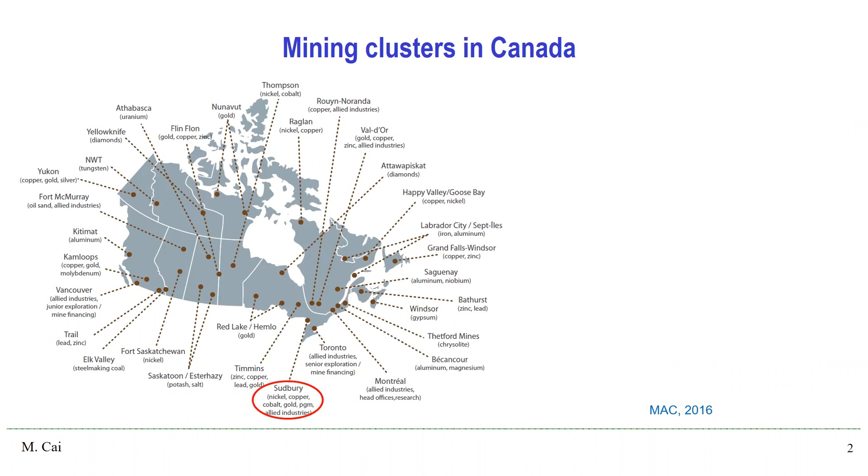Canada is one of the world's leading mining countries, mining and selling a diversified array of minerals such as aluminum, copper, gold, etc. Potash production is ranked #1 in the world. Uranium and nickel rank second. There are more than 1,000 mines in Canada. Quebec, Ontario, and BC have the most metal mines.

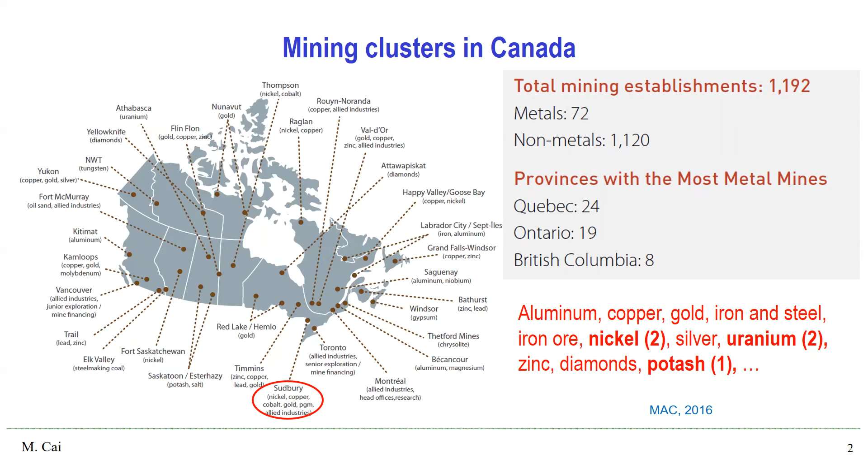Canada has many deep mines. LaRonde, Kidd Creek, and Creighton mines are in the list of the top 10 deepest mines in the world.

For those who have been in Toronto, you will see the CN Tower, which is 553 meters high. You will see it from any corner in the city. However, we need 4.5 CN towers stacked together to reach the bottom of Creighton mine. We need 5 CN towers stacked together to reach the bottom of LaRonde and Kidd Creek mine.

Many mines are in the Canadian Shield, which contains some of the oldest rocks on Earth. The Canadian Shield makes up roughly 50% of Canada's land mass.

In the Canadian Shield, the horizontal stress is about 1.5 to 2 times higher than the vertical stress. At a depth of 2,000 meters, the maximum principal field stress is about 60 to 80 MPa. When an excavation is created, the maximum tangential stress around the excavation can be as high as 150 to 200 MPa, which can fracture the rock easily.

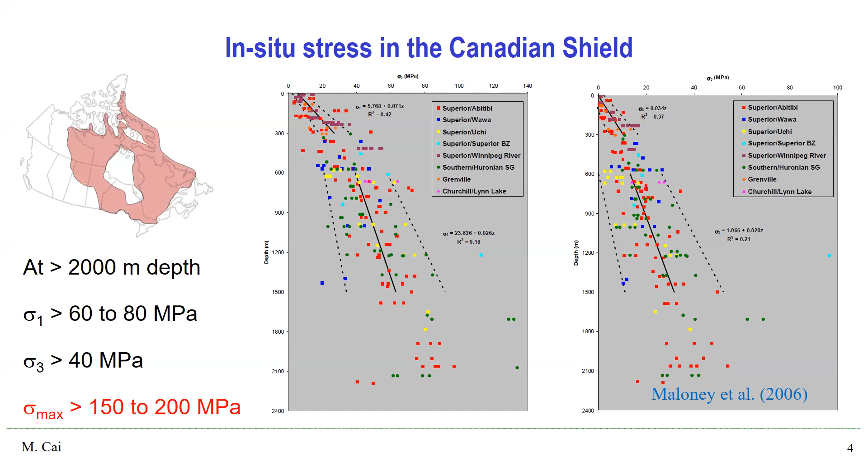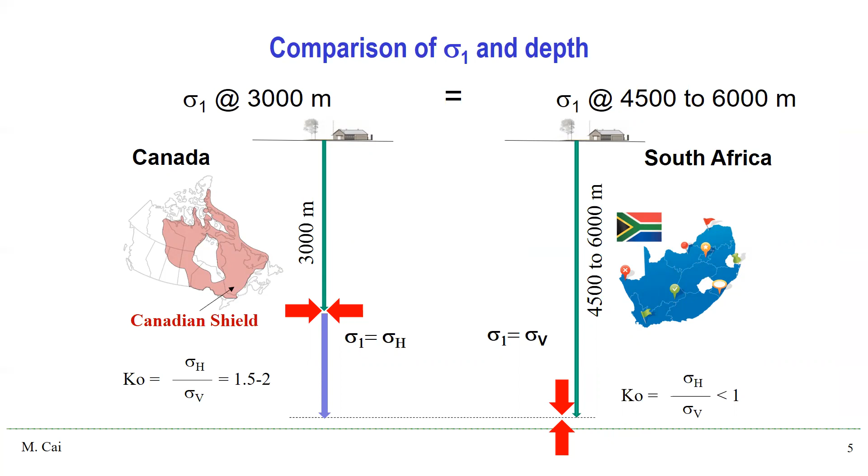Due to the high horizontal stress in the Canadian Shield, mining at 3,000 meter depths in Canadian mines is equivalent to mining at 4,500 to 6,000 meter depths in South African mines from the in-situ stress perspective. In other words, our shallow mines have more challenging stress problems than many other mines in other countries.

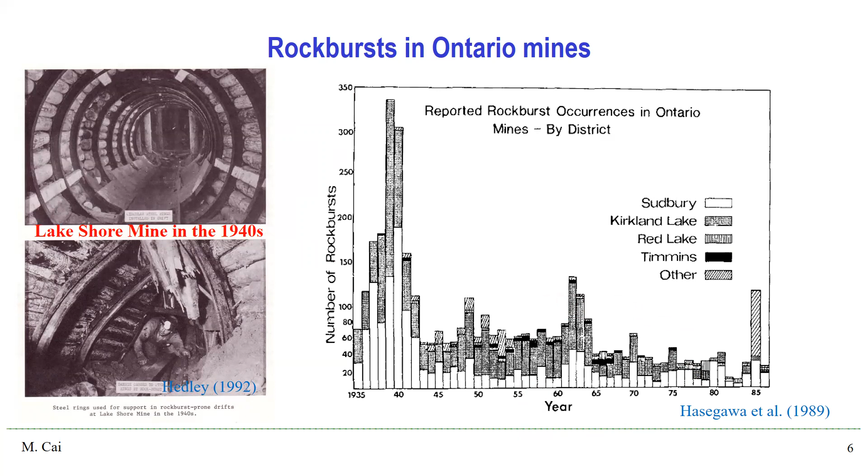In the 1930s and 40s, mines in Ontario had been dealing with rockburst problems in their operations. This figure shows the number of rockbursts in Ontario mines from 1935 to 1986. A decreasing trend can be seen, which was due to improved mining methods and technology.

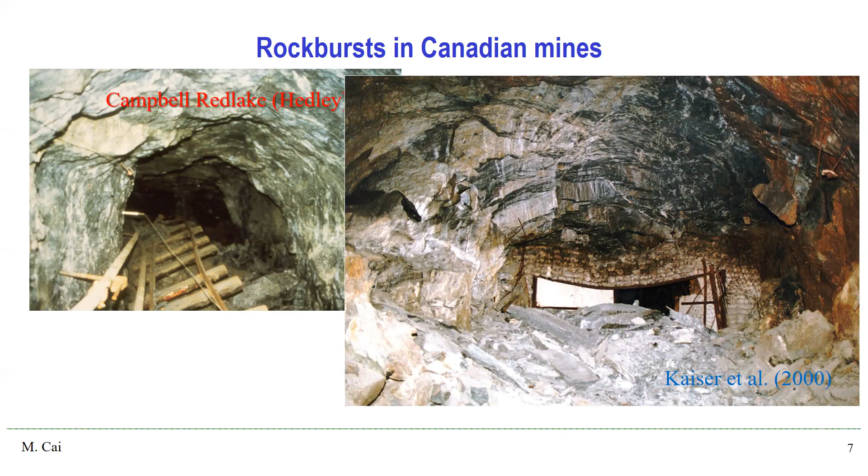Here are a few examples of rockburst damage. Rockburst in Campbell Red Lake mine caused floor heave. A rockburst caused large rock mass bulking and fall of ground at New Brunswick mine. A 3.9 event caused extensive damage to 4 levels in Kidd Creek mine.

On June 20, 1984, a 3.4 event occurred at the Falconbridge mine in Sudbury, killing 4 miners. This accident caused great concern in the Ontario mining industry. A provincial inquiry was conducted and a report produced, and this is the famous Stevenson report.

One recommendation from this report was that we need to conduct further research to understand the mechanism of rockburst. As a result, 3 research chairs were established in 3 Canadian universities.

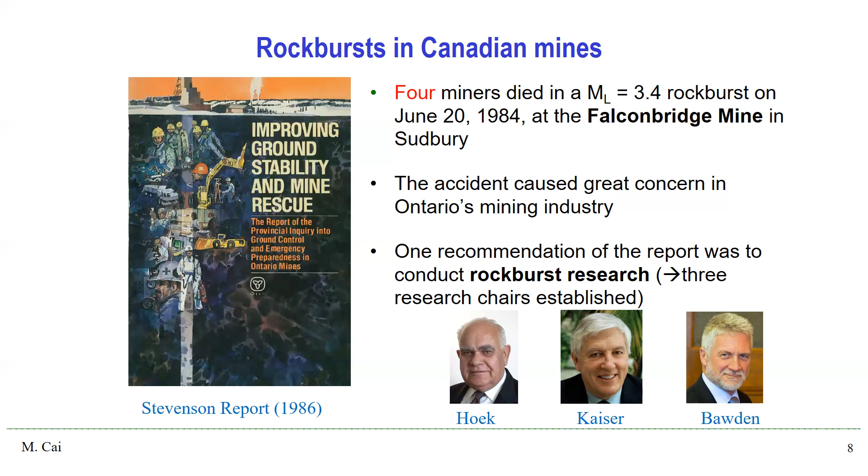Recognizing the problem of rockburst, some research projects had been conducted in Canada to address the problem. One major project was started in 1985. Through this project, all Ontario metal mines started to use microseismic monitoring systems in their operation. In the end, the Rockburst Handbook for Ontario Hard Rock Mines was published in 1992.

Another major research project was the 5-year Canadian Rockburst Research Program, supported by 12 mining companies and the Ontario government. A major focus of this project was to add knowledge in rock mechanics and ground control. One major outcome of this project is the Canadian Rockburst Support Handbook, published in 1996. This is a landmark work that laid the foundation for rock support design in burst-prone ground.

After many years of research by scholars around the world, we now have a better understanding of the conditions for a rockburst to occur. I summarize them into 4 conditions. First, mining-induced stress needs to be high to trigger rock failure. No failure, no rockburst. It's that simple.

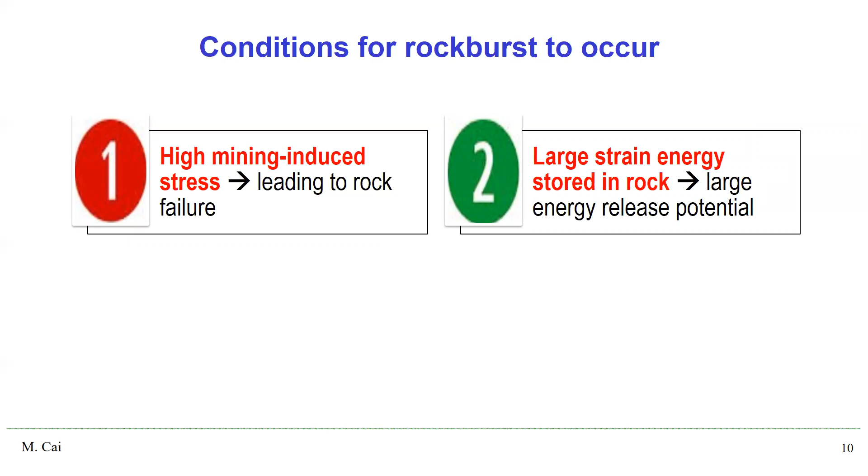Second, the rock must have the ability to store a large amount of strain energy before failure. This is why rockbursts occur in competent rocks. Third, the rock has to be brittle. Brittle rocks tend to fail violently when the confinement is low or rock support is insufficient. Finally, the mine loading system stiffness has to be low. In this case, rock failure is unstable or violent.

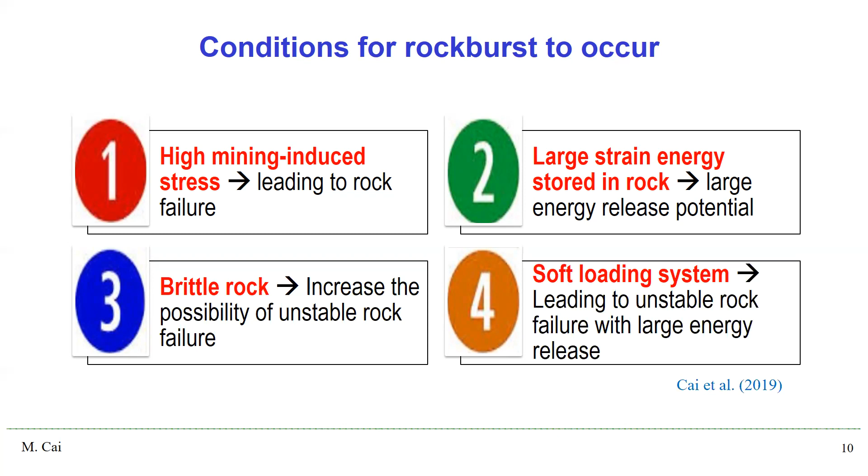Rockburst damage can be in various forms. Typical rockburst damage to underground excavations include seismically induced fall of ground, which is characterized by large blocks in piles on the floor, rock ejection, which is very common in strain burst, and excessive rock mass bulking.

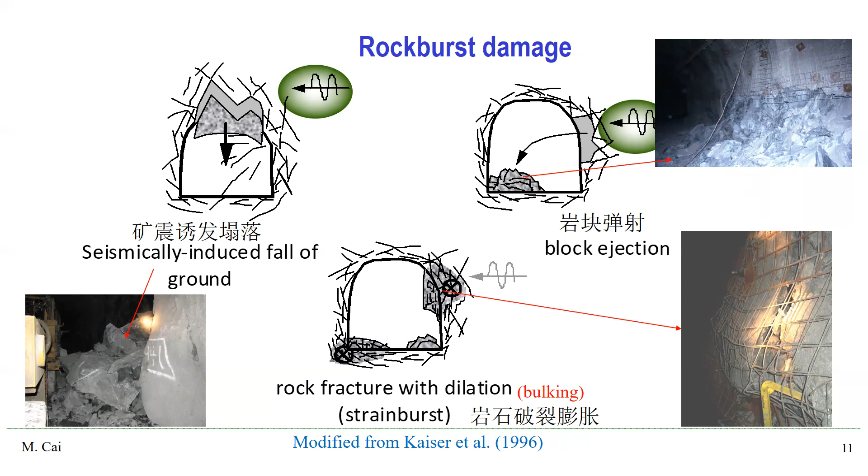There are so many factors that influence rockburst damage. The severity of damage can vary greatly over a small distance in a mine because of the variability of many factors that influence rockburst damage.

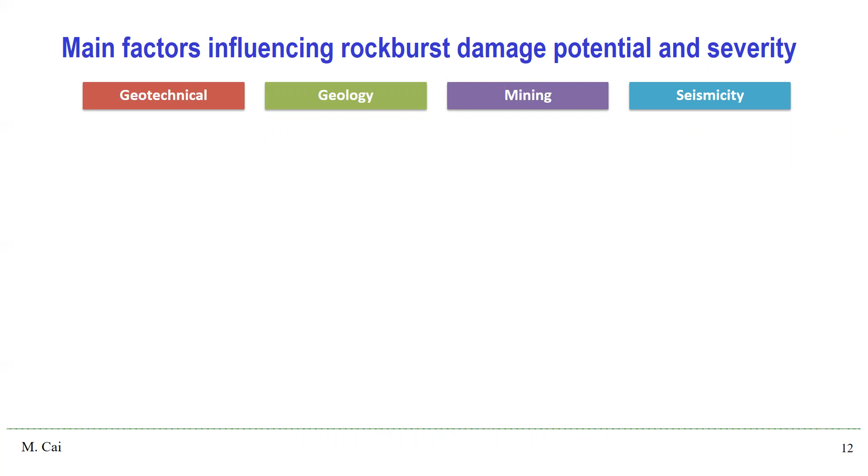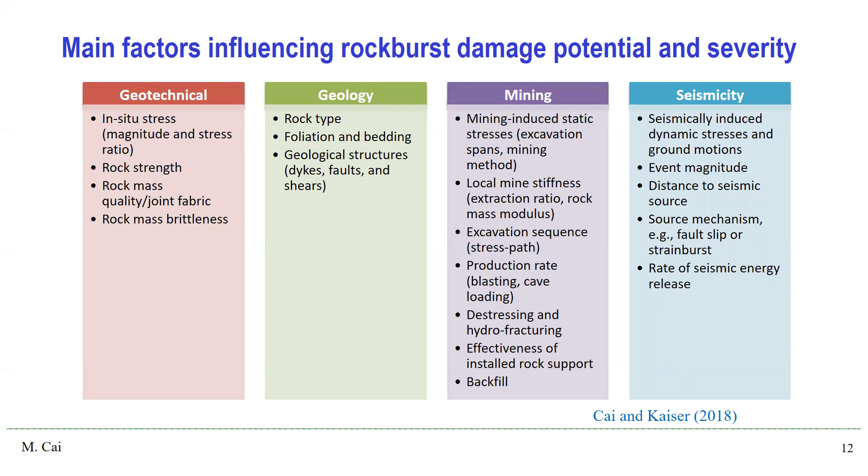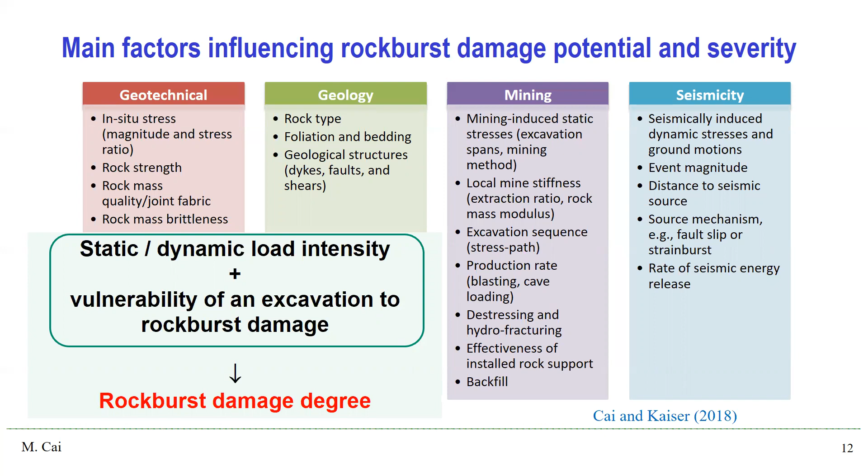So we group those factors into 4 groups: geotechnical, geology, mining, and seismicity. There are many sub-items in each group. Some of those factors listed in the figure determine the intensity of static and dynamic loading, and others determine the site response. Rockburst damage is therefore governed by the combination of these factors that defines the intensity of dynamic disturbance and the vulnerability of excavation to rockburst damage.

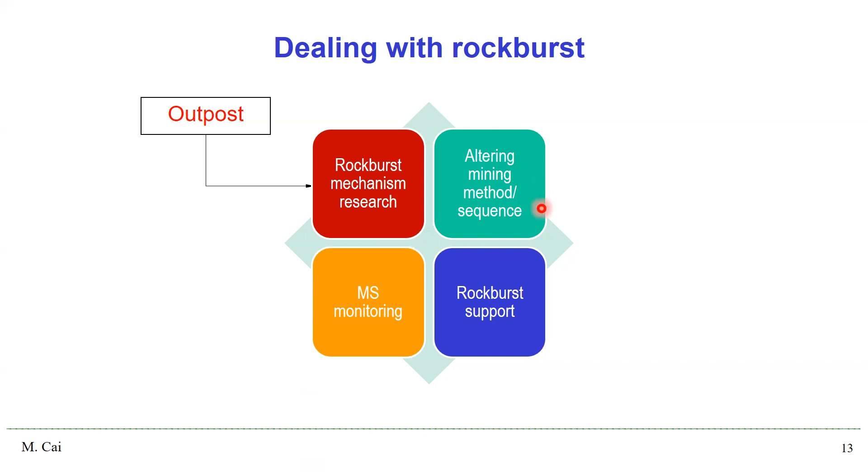Because rockbursts are predominantly stress-driven, the first line of defense is to create favorable conditions by altering mining method and mining sequence. This is our first line of defense.

We need to conduct microseismic monitoring because it allows us to reduce exposure of workers and equipment to areas of high risk. This is our second line of defense. We can do this through re-entry and exclusion policies to implement the second line of defense.

Finally, we need rockburst support. This is our last line of defense to avoid or reduce rockburst damage. In this way, we form multiple lines of defense to ensure mine safety and productivity.

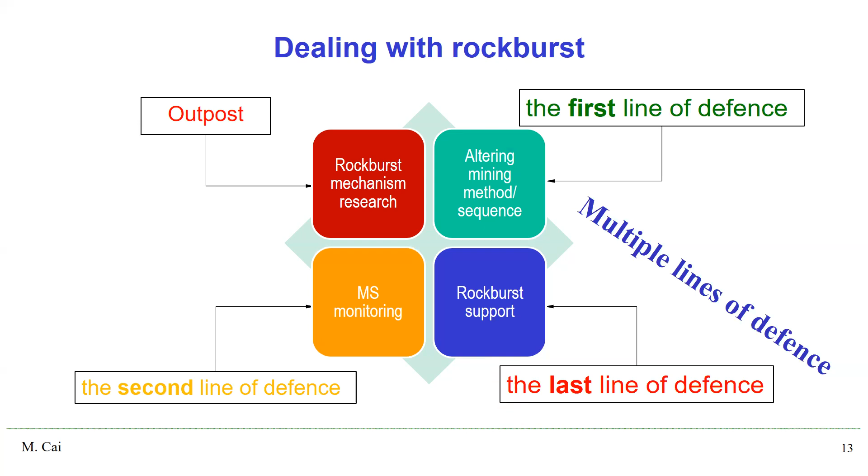Rock support is the last line of defense. Therefore, it is important to build the defense line correctly.

A rock support system is formed by integration of various support components such as rock bolts, mesh, shotcrete, straps, steel arches, etc. Together, they interact with each other, especially with the host rock, fulfilling the support functions.

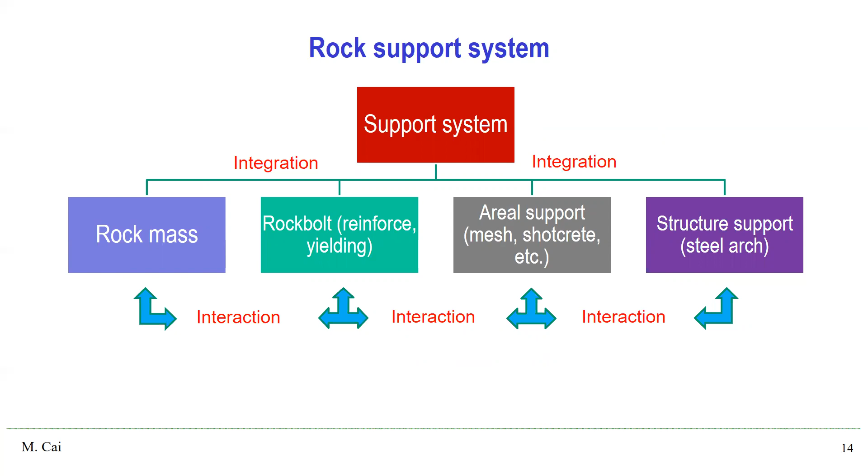A good support system needs to have three major support functions: reinforcing the rock mass, strengthening it, retaining stress-fractured rock, preventing unraveling and building gabions, and holding blocks of reinforced ground in place. So effective rockburst support needs all three support functions.

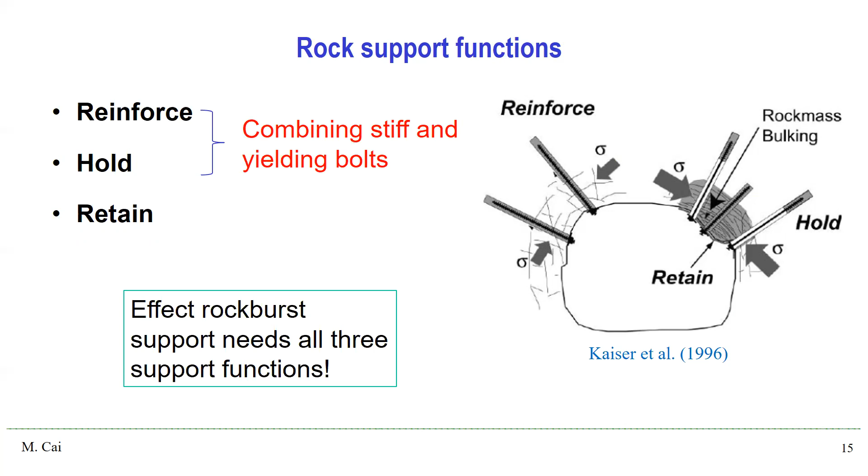For the reinforce and hold functions, we need to combine stiff and yielding bolts. For the retaining function, we need strong areal support.

Stiff bolts have higher load capacity, and they do not allow rock mass to deform excessively. This is important to enhance rock mass strength and reduce rock mass bulking.

When the rock mass bulking is controlled, the yielding bolts and the areal support will work better, and there is less chance for the rock support system to disintegrate.

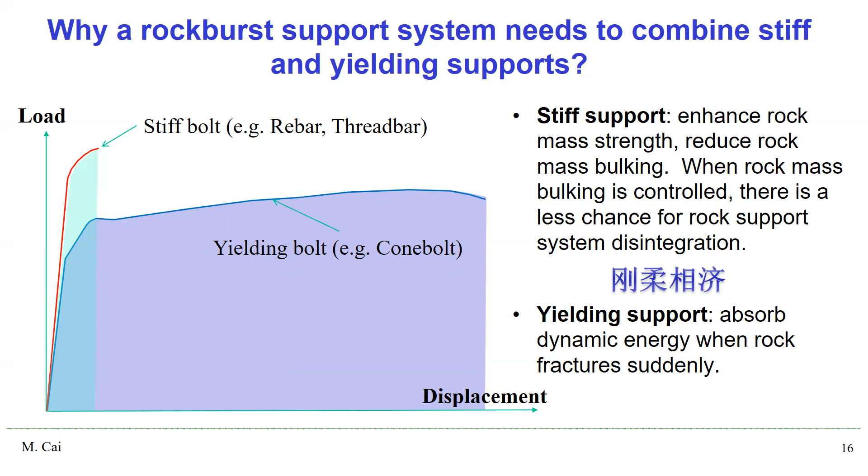Hence, a rock support system needs to combine stiff and yielding support. They help each other, just like this Chinese saying states: 刚柔相济，你帮我一把，我也帮你一把呀 (rigid and flexible complement each other, you help me and I help you). If we ignore these principles, there will be consequences. There are a few examples here.

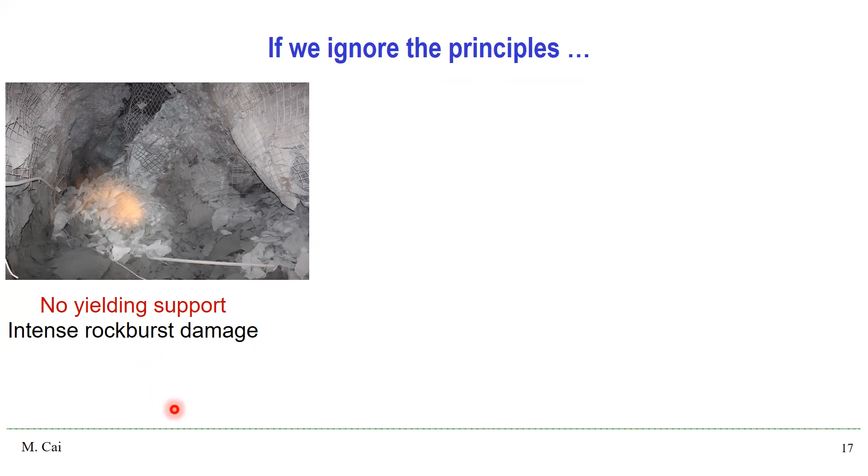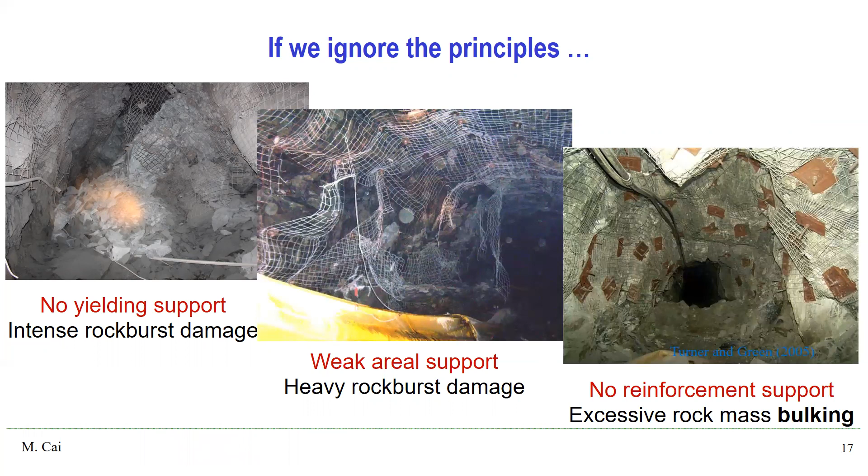And in this case, we don't have reinforcement support. This leads to excessive rock mass bulking. So all these damages could be avoided if we support the rock mass by properly addressing the support functions.

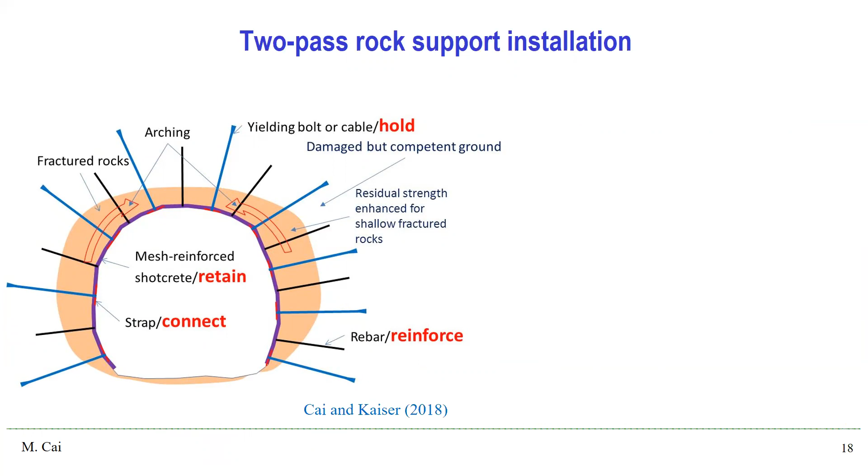This figure shows using two-pass rock support installation to combine stiff and yielding bolts. The stiff bolts, such as rebar or strap bar, can be installed in the first pass, and the yielding bolt can be installed in the second pass.

The disadvantage of this process is that the efficiency is low. In addition, rockburst may occur before the yielding bolts are installed, which is a safety concern.

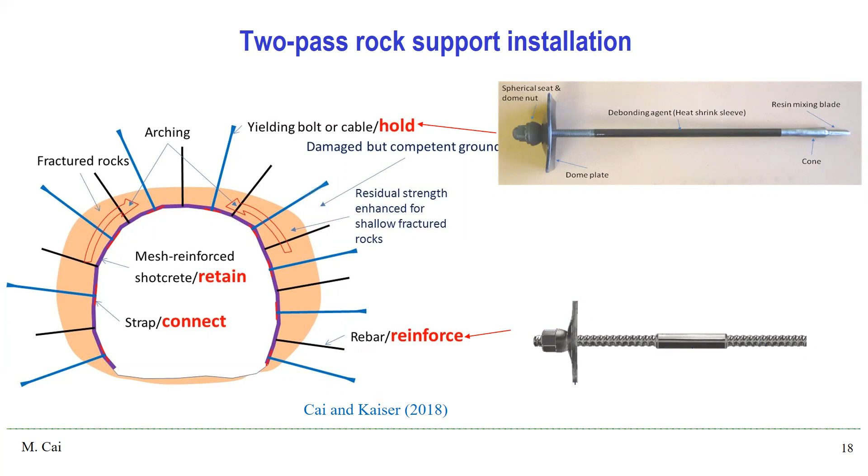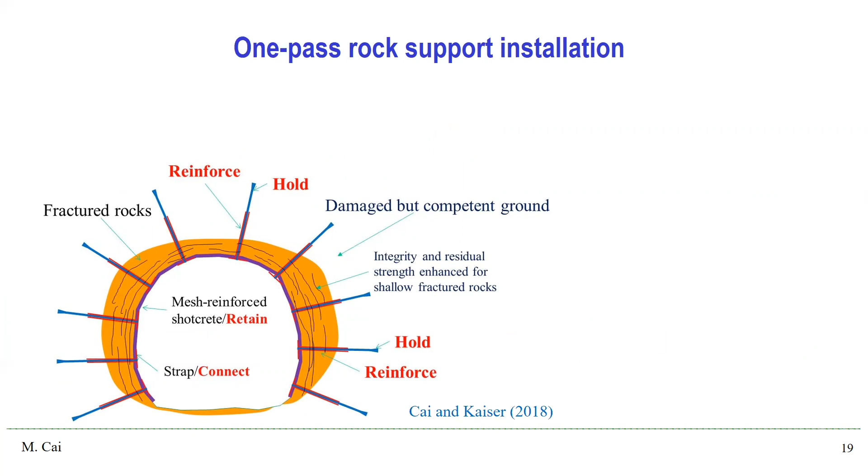To improve mine safety and productivity, we can use the one-pass system for rock bolt installation. For example, super bolts can be used for a one-pass system because super bolt has reinforce and holding functions, which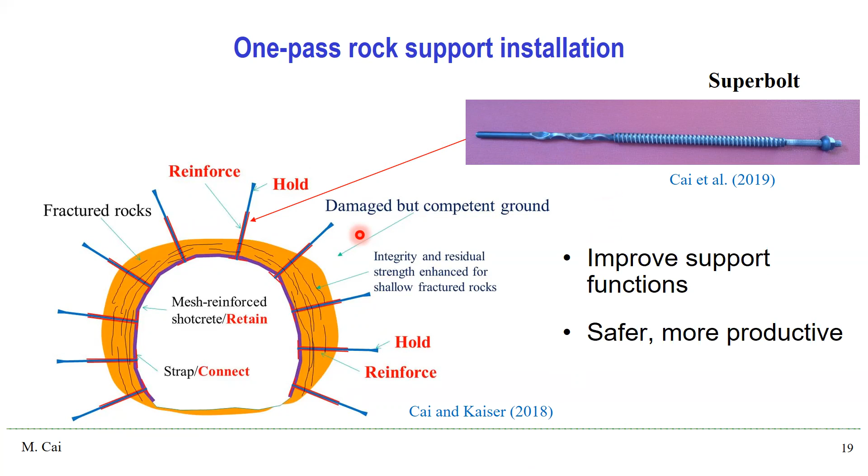is able to strengthen the rock mass and avoid rockburst damage once installed. This can create a safe, more productive working environment.

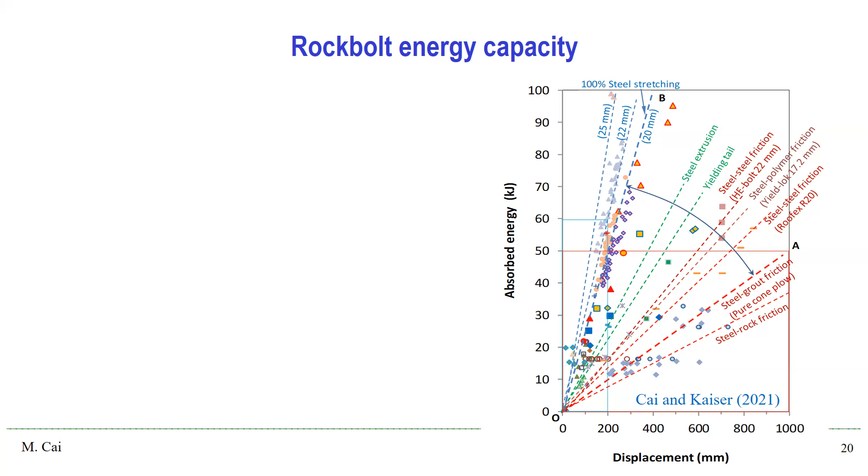Based on the analysis of those data, we identify that... we realized the energy absorption rate depends on the mechanism of the yielding bolt, whether it's steel stretching, steel extrusion, frictional sliding, or a combination of sliding and stretching.

When you have pure steel-grout or steel-rock frictional sliding, the energy amount at 200 millimeter displacement is less than 10 kilojoules. For pure steel stretching, E200 could be in the range of 40 to 50 kilojoules. That's for 20 millimeter steel bar.

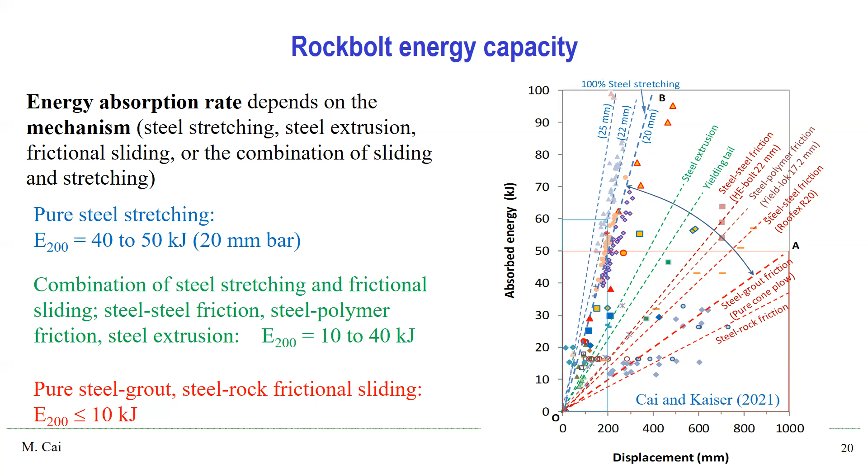If it's a combination of steel stretch and frictional sliding, or with some other sliding mechanism, then E200 will be in the range of 10 to 40.

Another important factor to consider is the energy absorption rate. This energy absorption rate is defined as the amount of energy absorbed per 100 millimeter bolt displacement. We use E100 to represent this energy absorption rate.

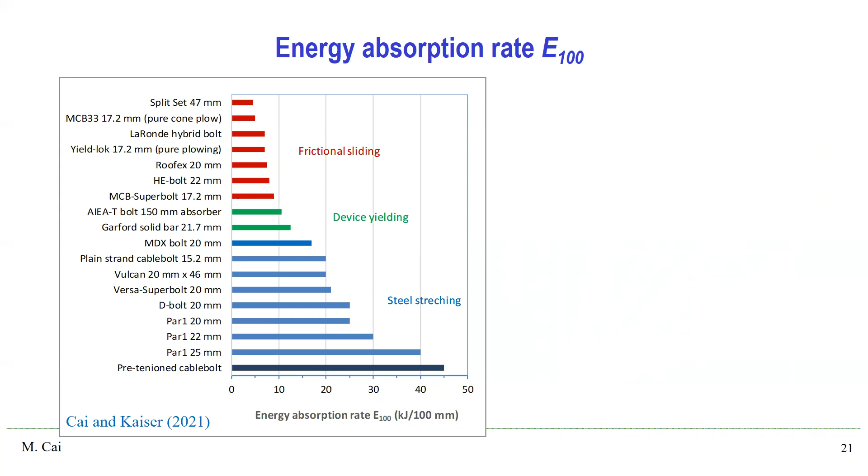You can see from this figure, rock bolts with steel stretching as the energy consumption mechanism have higher energy absorption rate than other bolts. For cable bolts made using high carbon steel, the energy absorption rate is the highest when steel stretching is involved.

For rock bolts having frictional sliding as the energy consumption mechanism, the energy absorption rate is low. The energy absorption rate by steel rock contact friction is the lowest. For rock bolts with a yielding device as the energy absorption mechanism, they have a moderate energy absorption rate.

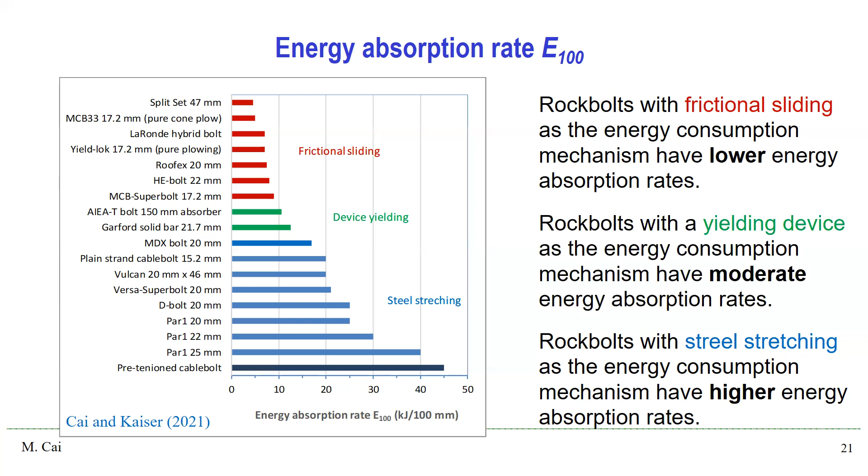To account for the energy capacity difference of a rock bolt tested by different direct or indirect loading, we define this energy ratio RE as ED divided by EID. Here, ED and EID are the energy capacity of the rock bolts under direct and indirect loading.

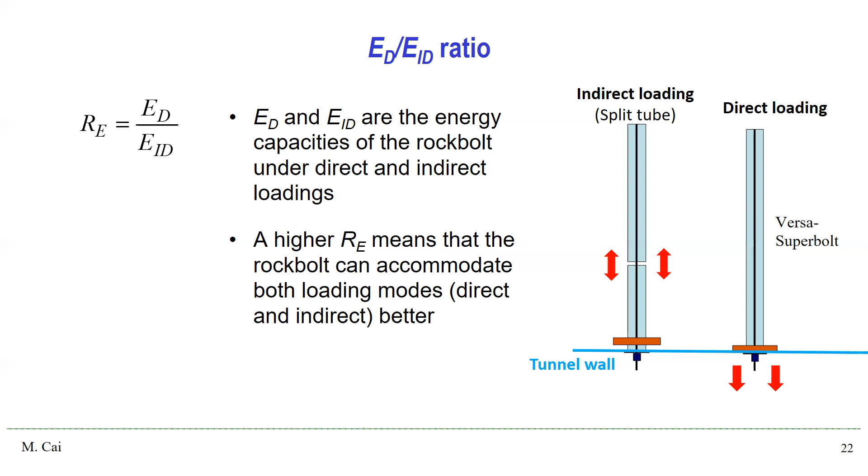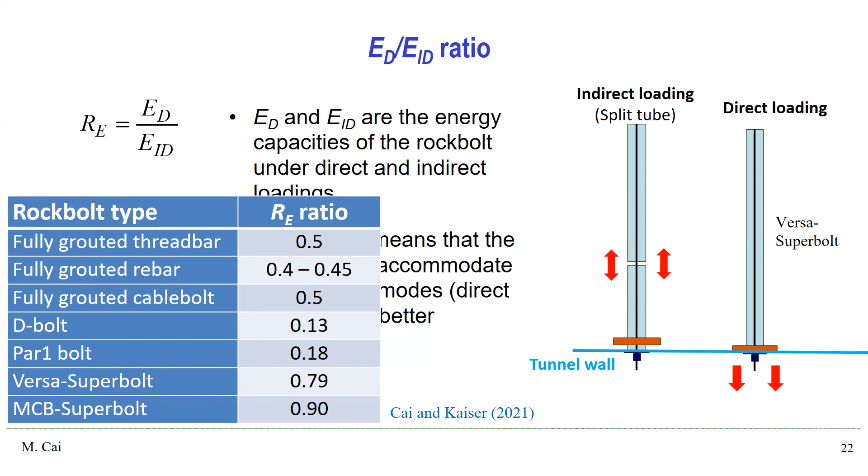A good dynamic rock bolt, in our opinion, should have some desired characteristics. Most people think a high energy absorption capacity is all a good dynamic rock bolt should have. This is not entirely correct.

A good dynamic rock bolt should have, first, high energy capacity, of course, but it also should have a suitable energy absorption rate. A larger rate is better, but this rate depends on the energy absorption mechanism, whether it's steel stretching, cold extrusion, or friction sliding.

The bolt should also have a high RE ratio, that's the direct and indirect energy ratio. The best is when this ratio is close to 1. It means that it can deal with both types of loading better.

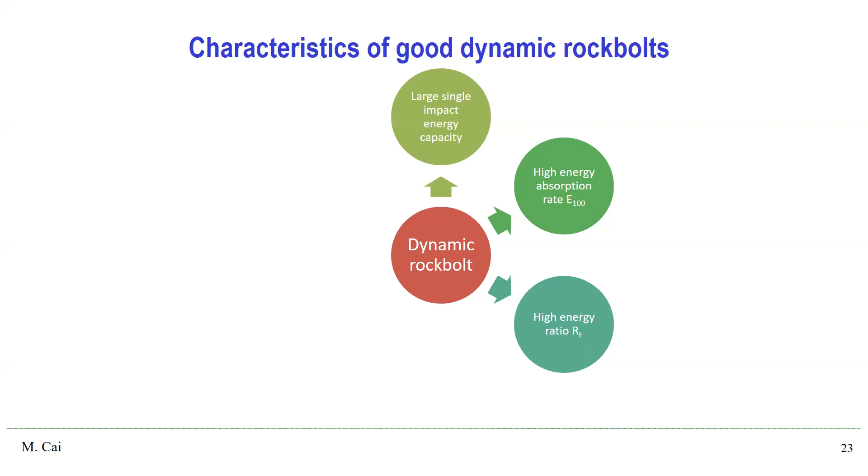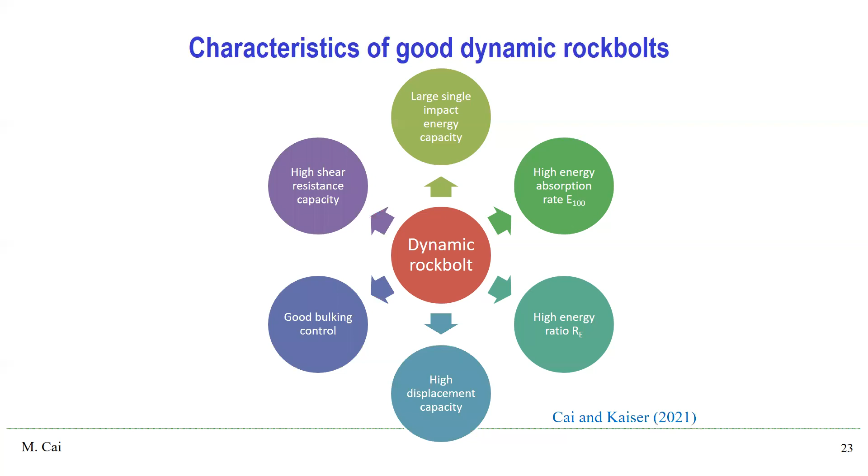Of course, the bolt also needs to have a large displacement capacity. The bolt also should have good bulking control ability, a high shear load capacity. All those are needed for forming a good dynamic rock bolt.

An effective rock support system is not just about the rock bolts. It also needs a strong areal support. The areal support is often the weakest link in the support system, as we see in the past. To overcome this weakest link...

Mesh reinforced concrete shotcrete can be used. Shotcrete is called a super mesh because it combines mesh and shotcrete. As a result, it is not only strong but also stiff, which is important for load transfer, that is, to transfer the load to the rock bolts, and the bolts can do a better job if load is transferred properly to them.

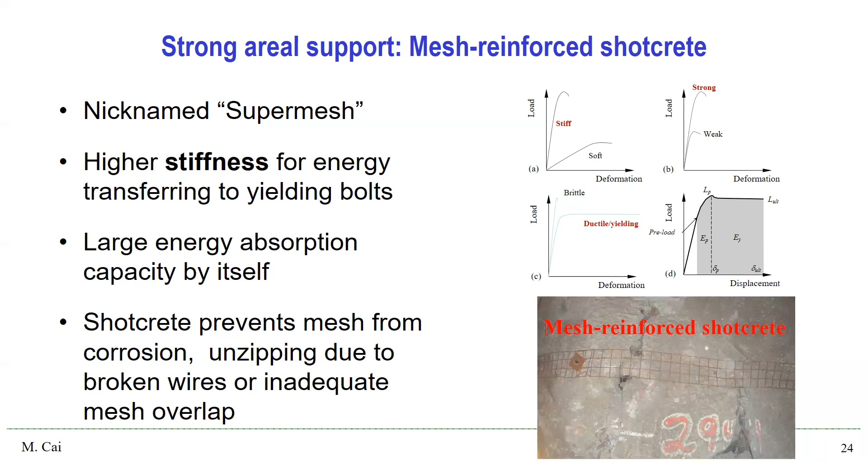Mesh reinforced shotcrete also protects the mesh from corrosion and prevents unzipping due to individual broken wires or inadequate mesh overlaps.

Another method to use is high-strength mesh to build a strong areal support. Most tensile strengths of the mesh use tensile strengths in the range of 400 to 600. The wire strength is only in this range.

But the tensile strength of the TECCO high-strength mesh is about 4 times higher, at about 1,770 MPa. The use of high-strength mesh can eliminate the weakest link in the support system and provide a strong retaining system to transfer load to rock bolts and hold fractured rock in place.

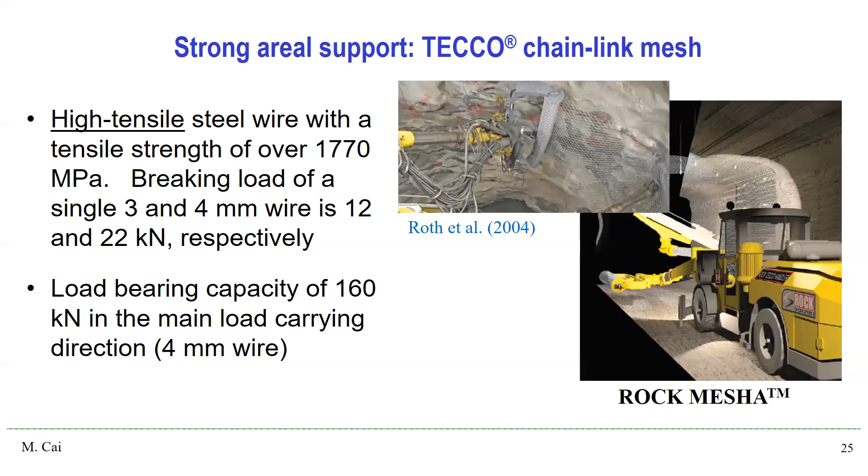To enhance the areal support, we can also use straps. This will make a strong connection between the bolts and the mesh or the reinforced shotcrete. Field observations and dynamic test results show that straps are effective to increase the support system's overall energy absorption capacity.

Rockbolt straps are stiff, and hence the installation is a little bit difficult. On the other hand, mesh straps are flexible and easy to use.

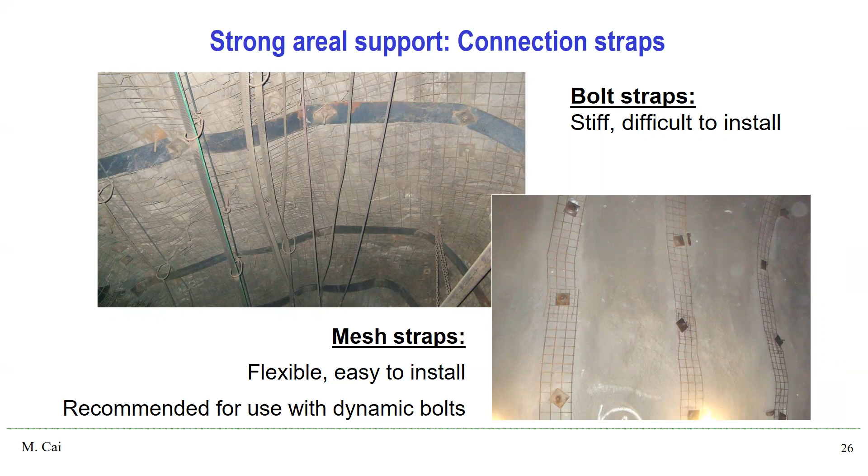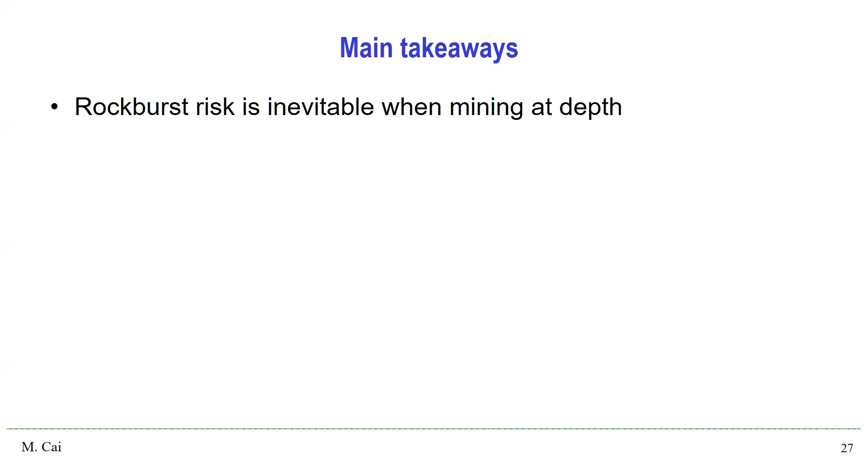Finally, I would like to summarize the main takeaway from my talk. Rockburst risk is inevitable when mining at depths. Hence, we have to deal with rockburst, live with rockburst. There are many lines of defense, but rockburst support is the last line of defense to ensure safety and productivity. We'll get the most from our investment if the support design is properly done.

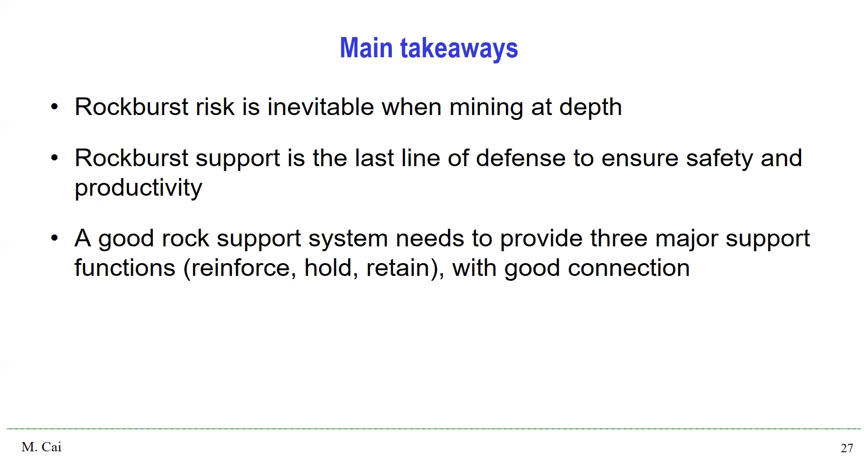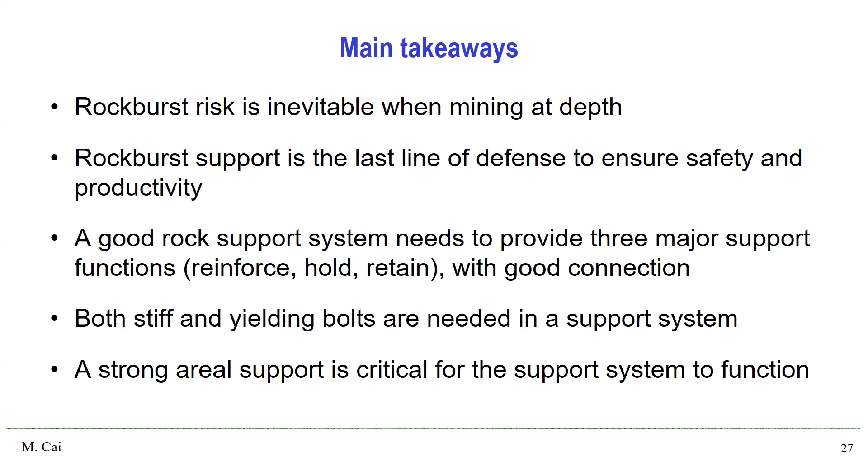A good rock support system needs to provide 3 major functions: reinforce, hold, retain with good connection. Both stiff and yielding bolts are important. They are needed in a support system. They help each other to survive rockburst damage. A strong areal support is critical for the support system to function. Otherwise, there will always be a weak link in the support system.

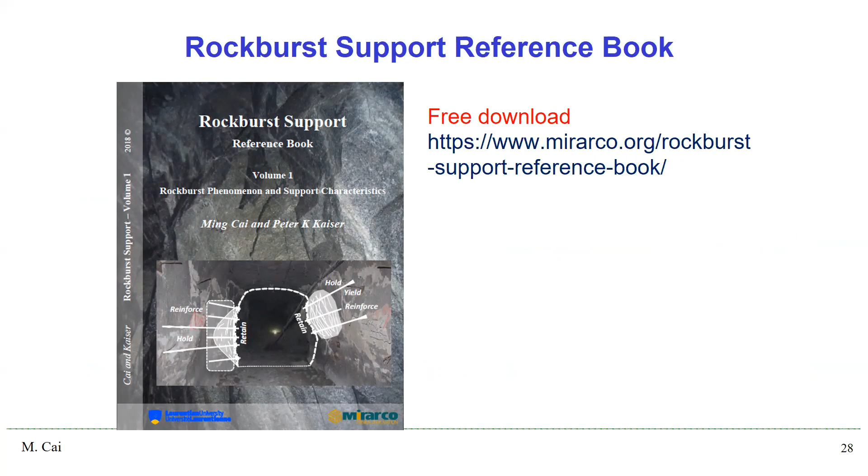Thank you for your attention.